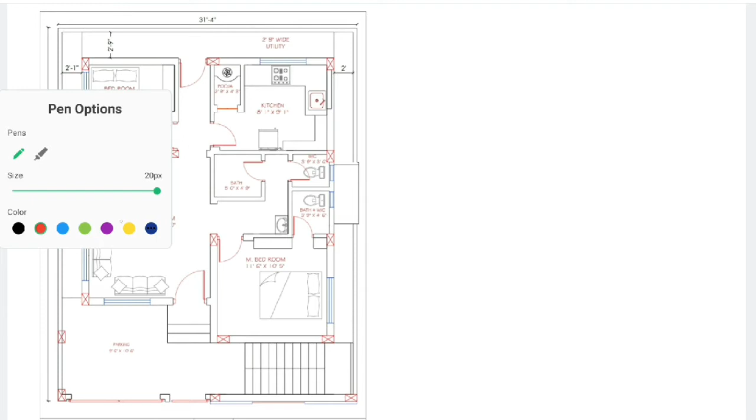The width of the site is 31 feet 4 inch and the length is 39 feet 9 inch. Even though 40 feet is considered, you can consider 40 feet also, whereas the actual size of the site is 31 feet 4 inch by 39 feet 9 inch. According to the requirements, we have prepared a plan.

Here you can see the living room, and on the right side of the living room we have provided a master bedroom. It is attached with a bathroom and water closet. Apart from that, a separate bathroom and WC is provided here. As per the client requirement, we have provided a kitchen, another bedroom, as well as a puja room. These are the requirements of the client.

One parking is given here for the two-wheeler. Suppose they construct more than one floor, in that case they require space for parking. That's why we kept a good parking space. Here I list out the sizes of every room.

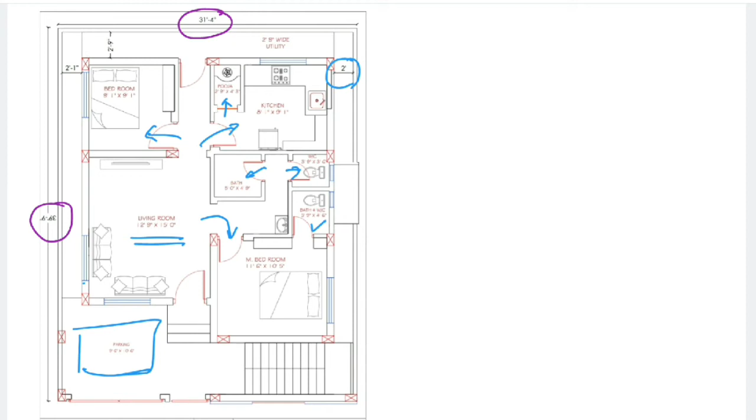Here you can see the offsets are given. On the right side of the building, only 2 feet is given. This one is the west facing side, as I said. So here is the north, south, west and east. On the south side we have given an offset of 2 feet. Apart from that, we have a compound wall of 5 inches. On the north side we have an offset of 2 feet 1 inch, and on the east side we have an offset of 2 feet 9 inch. In the west side, the space is given for the parking.

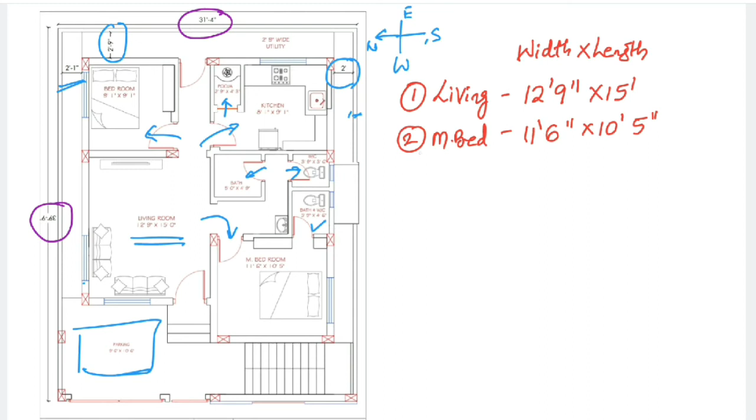Here we'll list out the room sizes. First one, the living room is 12 feet 9 inch by 15 feet, and the second one, the master bedroom, is 11 feet 6 inch by 10 feet 5 inch. The first one is the width, the horizontal dimension, and this is the length, the vertical dimension. Apart from this, in the master bedroom we have the bath and WC. Its size is 3 feet 9 inch by 4 feet 6 inches.

The fourth one is the separate bathroom. Its size is 5 feet by 4 feet 9 inches. Along with it, a separate water closet is given, of size 3 feet 9 inches by 3 feet 6 inches. Another bedroom is there; its size is 9 feet 1 inch by 9 feet 1 inch. Apart from that, we have the kitchen; its size is 8 feet 1 inch by 9 feet 1 inch. A puja room is also there, of size 2 feet 9 inch by 4 feet 3 inch.

Here we have given a staircase width of around 5 feet 6 inches, that is, each flight width is 2 feet 9 inches. That is mainly used to access the roof as well as the upcoming floors. So these are the basic requirements of the client, and we have fulfilled them within the specified size, that is 31 feet 4 inches by 39 feet 9 inches. Within this area we have given all the utilities and fulfilled all the requirements of the client.

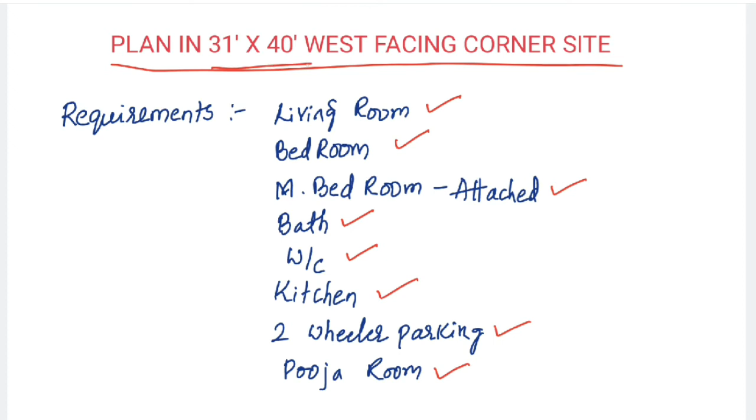So apart from that, we have provided the door and windows as per Vastu requirements itself. So this is all about the drawing or plan of a building in a 31 feet by 40 feet west facing corner site.

As I said, this is a corner site. The road is on either direction, that is in the south direction as well as in the west direction. Here we will be getting road, and in this direction also we will be getting road. This is a corner site. Mainly based on the client's requirements, we have kept the main door in the west direction. This is all about the plan of a residential building.

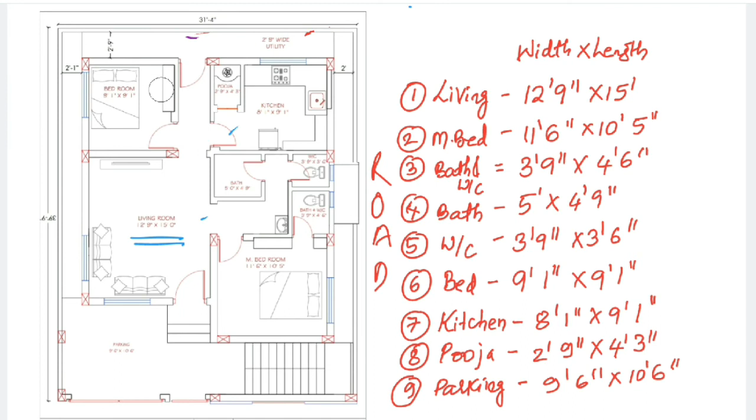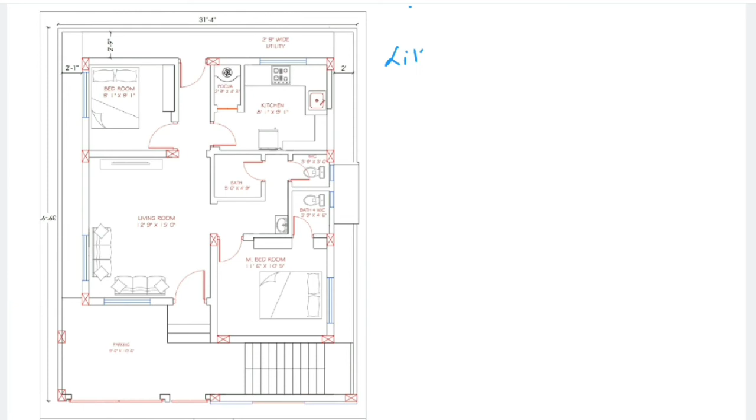And apart from this, I can suggest you the minimum sizes of the rooms. Whenever you prepare a drawing for somebody or for a client, the minimum space or size to be provided. So first, I'll take the living room size. For the living room minimum size, take the width 10 to 12 feet, and the length 12 to 14 feet. This is width and this is length.

Based on the site size you can vary. The size of the living room will vary, 10 to 12 feet you can vary the width, and sometimes you can go for a higher width also. These are the minimum spaces to be provided. For bedrooms, minimum go for 9 to 11 feet. Length also take 9 to 11 feet. If you want, you can go beyond these dimensions. Even for the bedroom or master bedroom, you can use the same spacing.

When it comes to the kitchen, take a space of around 8 feet to 11 feet, and in this direction also 8 to 11 feet. These are the minimum dimensions. Please don't go less than these dimensions. Apart from this, for the puja room, minimum take 2 feet 6 inches to 3 feet 6 inches width, and the length 4 feet 6 inches, or if you want, 4 feet to 8 feet length for a puja room.